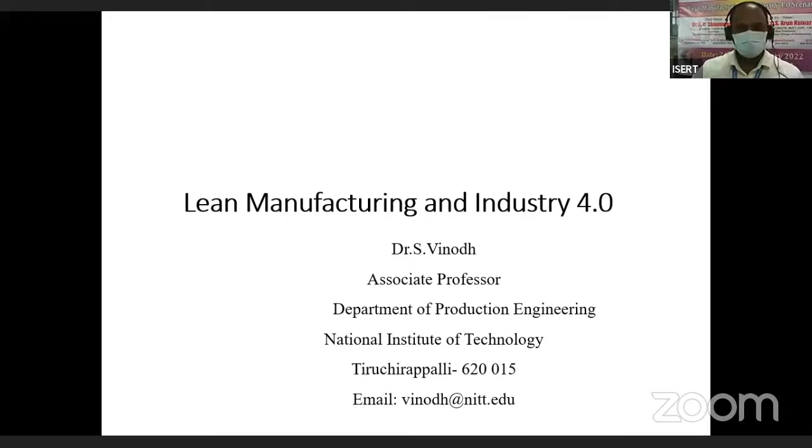Good morning all, Republic Day greetings to all. In this session I'll be focusing on lean manufacturing and Industry 4.0. As a continuation to yesterday's lecture, we'll proceed with the secondary tools of lean manufacturing, then discuss the lean manufacturing rules, and then I'll proceed with Industry 4.0 concepts and technologies, the relation between lean and Industry 4.0, how they are interconnected, and also some research perspectives. In value stream mapping, which we discussed yesterday, I'll show a few research studies as well. This will be my flow of presentation, and I request all participants to be interactive.

So yesterday we discussed the primary tools: 5S, TPM, and value stream mapping. Today we'll discuss the secondary tools of lean manufacturing. For any lean implementation, it basically has to start with the primary tool, and the secondary tools will help in further analysis. In a practical scenario, hybrid approaches and hybrid tools will be applied.

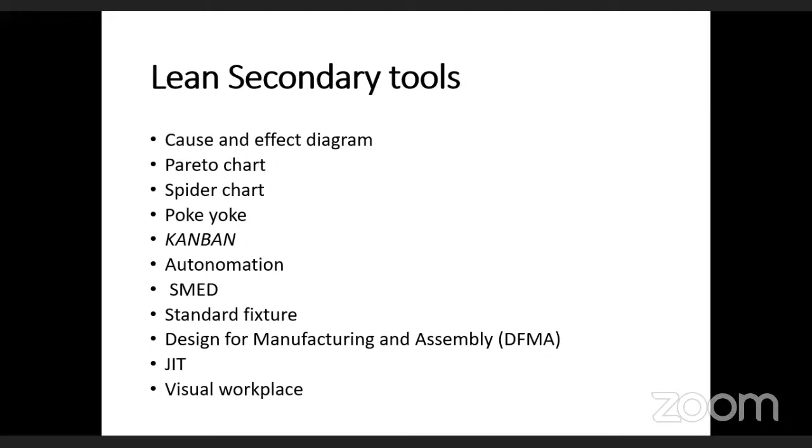So along with the primary tool, a set of secondary tools will be applied. I'll show in research studies how these hybrid tools are applied, because we need to keep in mind the real-life scenario so the discussions are more relevant. These are the set of secondary tools we have; let us discuss one by one. Some tools may have been prevailing in total quality management and total productive maintenance, but there are some exclusive tools for lean as well. The first tool is the cause and effect diagram, otherwise popularly called Ishikawa's diagram or the fishbone diagram, because the quality guru Ishikawa introduced this cause and effect diagram. Its purpose is to analyze the interrelationship between causes and effects.

We need to find out the root cause of the problem. In this illustration, the effect, which is on the head part of the diagram, is the poor delivery to the customer.

When we analyze further these reasons or causes, we have man related, machine related, method, materials related, and so on, based on 4Ms given. From a man perspective, there is no training, or there is absenteeism of the workforce, or the commitment may be lagging, and so on. These are the primary level causes.

Each primary cause should be further analyzed, because a cause and effect diagram will be more effective when we have more branches in it. For example, there is no training - a primary cause. We need to analyze why there is no training: maybe management is not willing to offer training programs, or the workforce is not willing to participate, or maybe such a culture is not prevailing. This could be the secondary cause.

From the machine perspective, frequent breakdowns are happening, or the capability of the machinery is not up to the level, or proper tools are not being utilized, and so on. Why do frequent breakdowns happen? Maybe downtime related issues, or maintenance procedures are not being followed effectively. Likewise, we have a set of secondary causes.

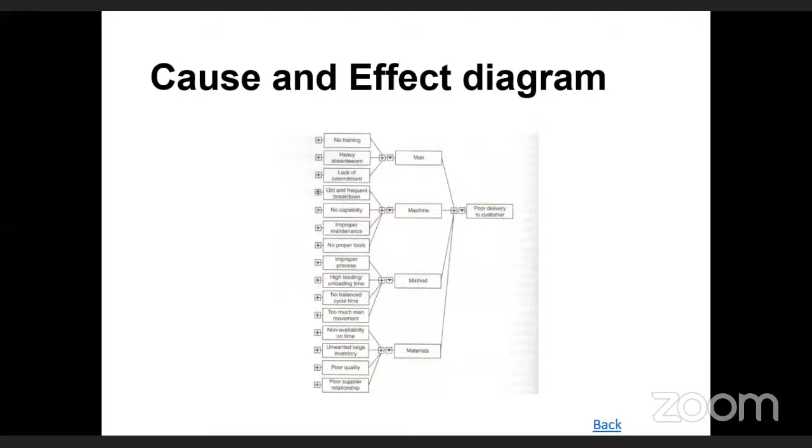Ultimately in this cause and effect diagram, the interrelationship between the causes and effects needs to be analyzed, and we need to come out with a set of root causes we should be able to identify. That is its significance - it has a lot more applications in the field of lean manufacturing as well.

Next comes the Pareto chart. The Pareto chart is based on the Pareto principle, popularly called the 80-20 principle.

The Pareto principle states that 20% of the causes are called vital few causes, which contribute to 80% of the problem. But another 80%, the trivial many causes, contribute only to 20% of the problem. Our focus should be on that 20% of vital few causes, which contribute to 80% of the problem.

In this illustration, normally in the Pareto chart, we need to draw that Pareto curve, the cumulative effect curve. That is most important - the significance of that Pareto curve is that we'll be able to find that 80-20 transition. If I try to track this cumulative effect curve, we always need to track in the descending order of its magnitude.

We could see the material defect, machine availability, operator availability, and downtime - these causes are responsible for 80% of the problem. Accordingly, the improvement actions need to be taken.

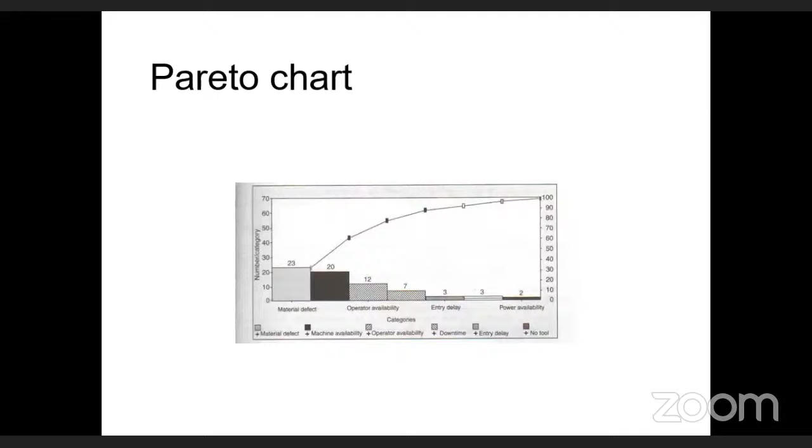The third one is called spider chart or radar chart. Yesterday in my presentation, I showed this in some context. Any of the participants, could you recall from where we discussed this kind of spider chart or radar chart yesterday? Are you able to correlate? Yesterday I showed in my presentation this kind of spider chart or radar chart somewhere - could you find out where I showed it?

Yesterday while discussing 5S, I told you the 5S auditing we need to do, and we have to represent this score of 5S auditing on a typical spider chart or radar chart, because the spider chart or radar chart is used to represent the various parameters at a single shot, so that it reduces the voluminous reporting.

So if you see here, with a target of 100%, productivity is lagging by 10%, and the available time is lagging by about 12%. Throughput is lagging by about 11%, and the attendance or absenteeism of the workforce is contributing to about 5% - the target is lagging by 5%.

And similarly, the safety related issues are lagging by about 5%. Likewise, here, a spider chart or radar chart will help us analyze the various parameters, and it will help us take appropriate actions. Here, we need to take utmost care on productivity. Why is it lagging by 10%? We need to analyze and come out with a set of solutions.

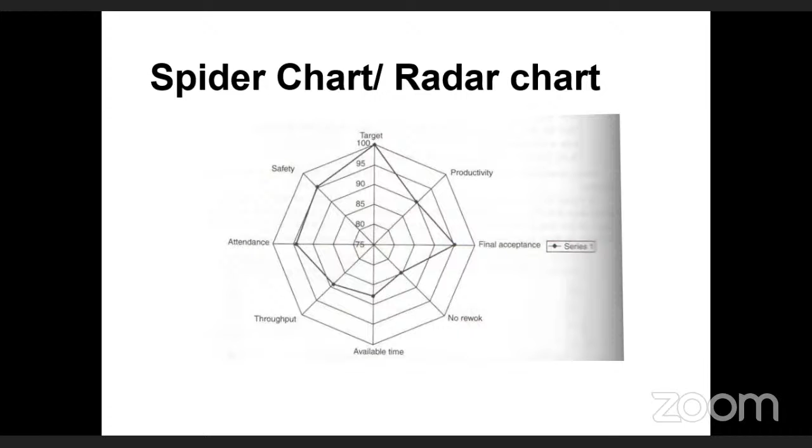The fourth secondary tool is Poke-Yoke. It's a Japanese term which means mistake proofing. So here, the scope of Poke-Yoke is it's a kind of prevention device, a prevention approach which will help us avoid the occurrence of mistakes.

So as we know, the human workforce tends to commit mistakes for several reasons. Sometimes it may be unintentional kind of issues also, and we need to make the system mistake proof, so that such kind of mistakes should not occur. So it's basically a prevention device which is used to avoid the occurrence of mistakes. That's the significance of this Poke-Yoke based mechanism.

If you see some practical examples of this Poke-Yoke mechanism, I could tell a few examples. While operating with CNC machine tools, normally the door has to be closed properly. Then only the machining activity will commence. If the door is not closed, then a signal will be indicated, maybe a kind of sound signal or a light signal also may appear, some kind of alarm sound we can get. So it's an indication that the doors have to be closed. Then only the operation will start.

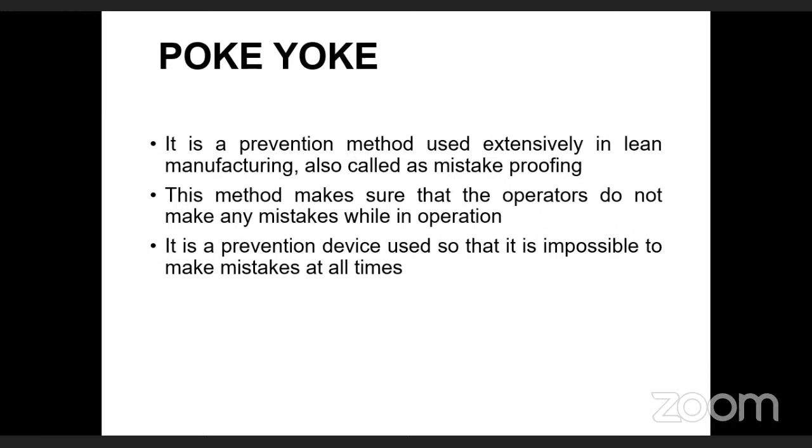And another example for this kind of Poke-Yoke thing is in the jigs and fixtures design, always we try to incorporate this kind of mistake-proof concept. The elements of jigs and fixtures are being designed appropriately with the Poke-Yoke concept, so that it facilitates quick changeover, and thereby the production tooling is incorporated with this mistake-proof aspect.

The next secondary tool is Kanban. Again, Kanban is a Japanese term which means the instruction card. It's an indication to initiate production. Whenever there is a need or requirement for assemblies or manufacturing activities to start, the Kanban card will be an indication.

Basically, it's a pull mechanism used to facilitate the transfer of parts, maybe from one location of the shop to another location. And it is based on the pull system, meaning any movement will happen only with the Kanban card. So the trolleys and containers will be incorporated with the Kanban card, so that this Kanban will deliver the right quantity of material to the right location at the right time. That's most important. It is basically used in the context of pull production system.

And this Kanban mechanism is more effective, and it facilitates not only the transfer of parts, but also acts as a very good visual control, so that any trolley or container movement, when we want to track or see the focus of that particular movement, we'll be able to see the Kanban card.

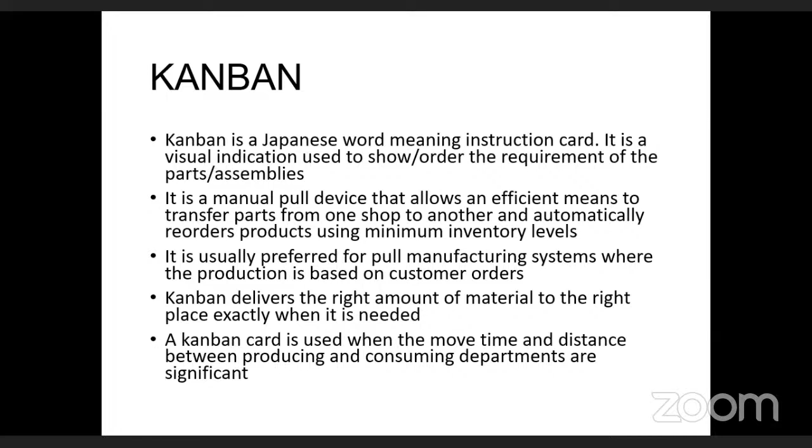And here, if you look at the design for the Kanban system, any movement of a trolley or container will happen only with a Kanban card. And a Kanban card will never accept the defective parts. That is the significance of the Kanban system.

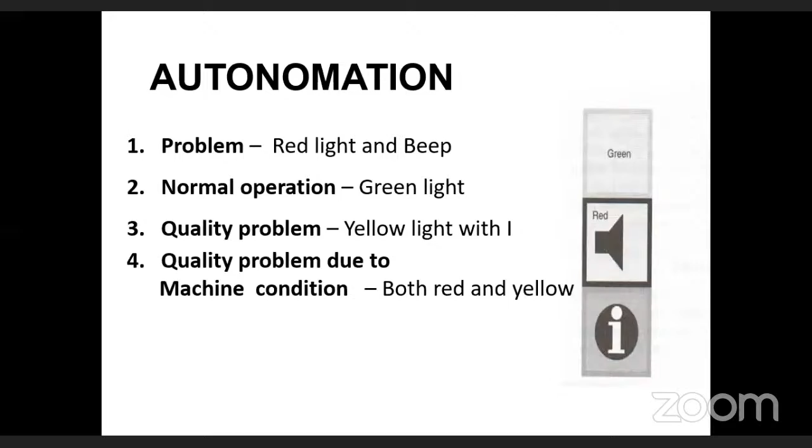Next one is, before we go ahead with DFMA, we have single minute exchange of dies, that is SMED. Yesterday also we discussed SMED. It facilitates a quick change of setups, because the change of setups has to be fast, otherwise it will contribute to changeover time, which may affect the lead time. Such exchange of setups is facilitated using SMED, single minute exchange of dies. Otherwise it is called the quick changeover concept.

It facilitates a rapid changeover of the setups. As per the Japanese theory, SMED, the exchange time between the setups should be very less, should be less than a minute, that's the idea. We try to optimize that time level. So SMED is also a very, very important tool.

The next tool is DFMA, Design for Manufacture and Assembly. Here it is all about how to consider the manufacturing aspects during the design phase. As we discussed yesterday, we have a set of customer requirements. We need to convert it to design requirements and further process requirements and so on. In this translation, in this conversion, effectiveness is most essential. It's basically a cross-functional team approach.

What DFMA does is nothing but try to take into consideration the raw material aspect, manufacturing aspects, quality aspects, and assemblability aspects. All those considerations need to be done during the design phase, so that a design which is made can be easily manufactured. That is the whole intent of DFMA. It is a very important concept which facilitates this kind of concurrent approach to design and manufacturing, thereby a design which is made can ultimately be manufactured and further assembled without any kind of issues.

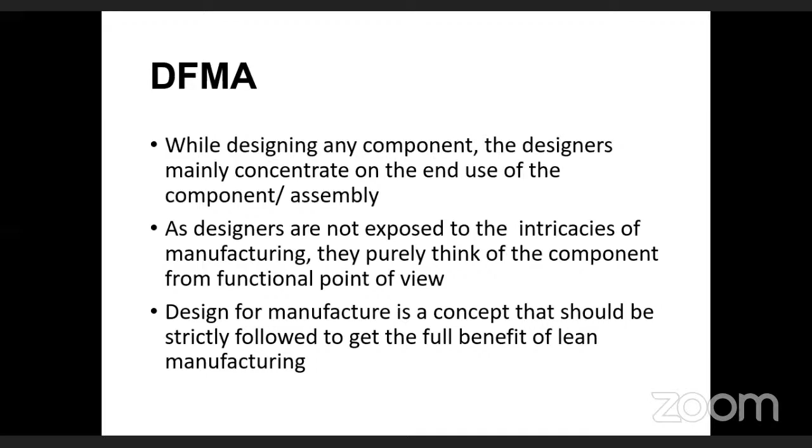Next one is JIT, just in time. As we discussed yesterday, just in time is a concept where whenever we get the customer requirement, we need to procure the material, manufacturing activity has to happen, and the product has to be delivered to the customer. So just in time: raw material to be retrieved, component to be manufactured, it has to be delivered to the customer. Some of the governing principles of a JIT system...

We should not produce unless we always have a definite customer demand, it's based on a pull system. We need to link all the processes to the customer demand through simple visual tools. Yesterday we also saw value stream mapping, which is in line with that. We need to maximize the flexibility of both the workforce and the machinery, and quality improvement should be there, defects have to be reduced. We need to control the raw material and finished goods inventory as well. These are some of the governing principles of the JIT system.

Also, as a part of the JIT system, we need to consider the reliability of the equipment. Reliability of the machinery and equipment is also an important factor to be considered.

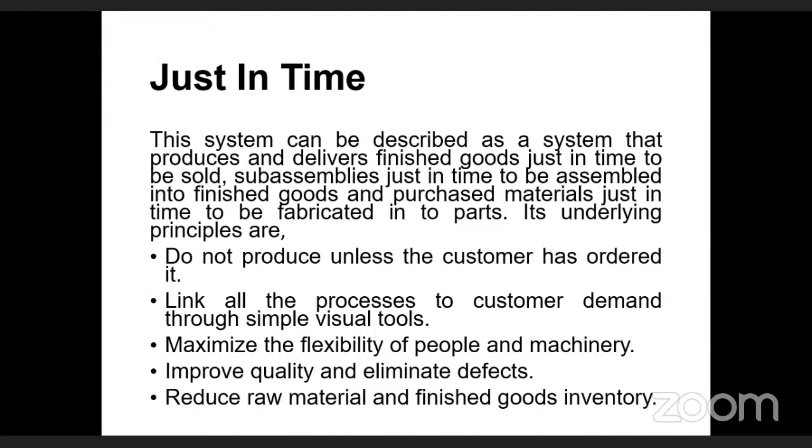Process capability of the machinery and equipment is most important, because in order to fulfill the customer requirement, we have a typical design requirement and process requirement. But the machine tool should have the capability to fulfill that requirement. That's most essential. That's the significance of the JIT system.

Next, the last secondary tool is the visual workplace. Since Lean is all about facilitating visual communication, we need visual information and visual controls, maybe a kind of manual board. If you see in manufacturing shops, sometimes they have a whiteboard.

They try to incorporate all the details, say for example, what target was attained in the previous shift, what is the target for the current shift, how much they have attained, and how much it is lagging.

A manual whiteboard can be replaced with a digital board. In industries, they use a digital board which indicates how much was the target, how much quantity they have produced, how much quantity they are ready to produce. Status updates happen accordingly.

It's very important that these kinds of IT-based and electronics-based utilities be deployed so that the entire workforce is aware of the targets and what is being attained.

These are the 10 secondary tools which we discussed. As mentioned, the secondary tools help the primary tools in further analysis and investigation. Any lean implementation naturally starts with a primary tool, and a set of secondary tools will be utilized. It goes with a kind of hybrid setting normally.